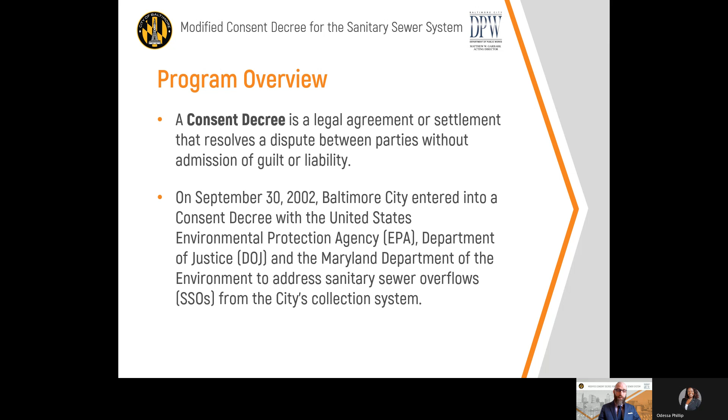We also had to develop a hydraulic model to evaluate flows through our collection system, and then we set forth projects that the city would complete to reduce overflows, and these projects were set to be completed by 2016. Now, the city was not able to comply with that 2016 deadline, in part because we discovered a hydraulic restriction at our Back River wastewater treatment plant.

So once we understood the scope of this almost 10-mile hydraulic restriction, it forced the city to reevaluate its plan to remediate the sanitary sewer system. So we went back to the drawing board with EPA and MDE and modified our consent decree.

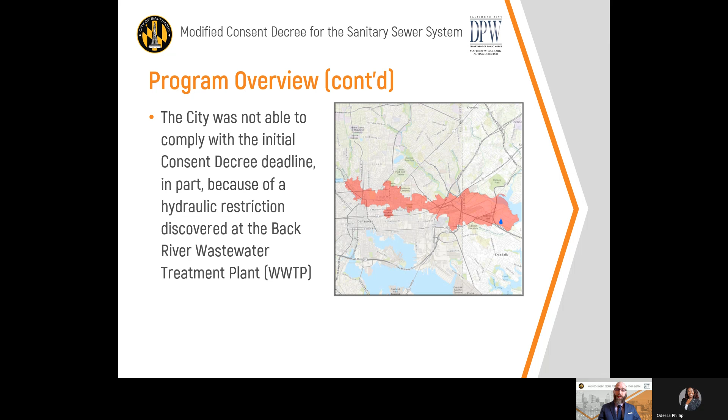So we're here today to give you some background on the modified consent decree, provide updates on the work we are doing to remediate the sanitary sewer system, really connect you to the people responsible for that work, and then answer any questions that you might have.

Now, when we drafted the modified agreement, we didn't simply add a few projects onto what we agreed to do in 2002. We did add projects, specifically the Headworks project, that is designed to eliminate that hydraulic restriction, but that's not simply all we did. We developed a new strategy that implements adaptive management concepts as seen in our two-phased approach, which creates a specific performance goal for our system once the remediation is completed.

We're not just completing a list of projects, we will complete existing projects plus the Headworks project. That should address 83% of the sanitary sewer overflow volume. But we're then going to evaluate the effects that those projects have had on our system. Then we're going to design and complete any further projects that are needed to establish a certain level of protection. We want a 5-year level of protection citywide and a 10-year level of protection for sensitive areas.

We also extended the time frame for compliance, and we did this for two reasons. First, we're doing more work, and I think we're making sure that we're doing things correctly.

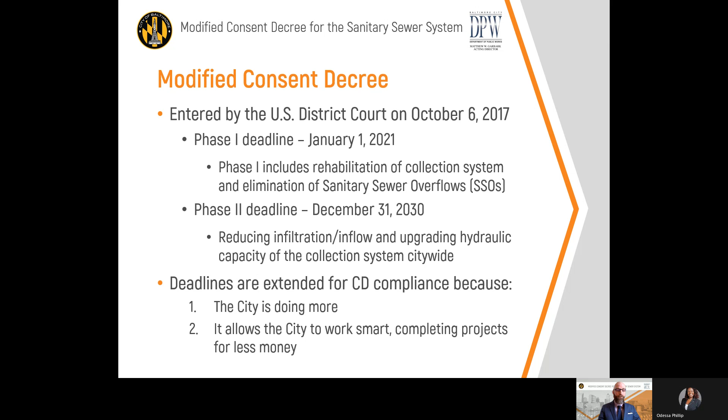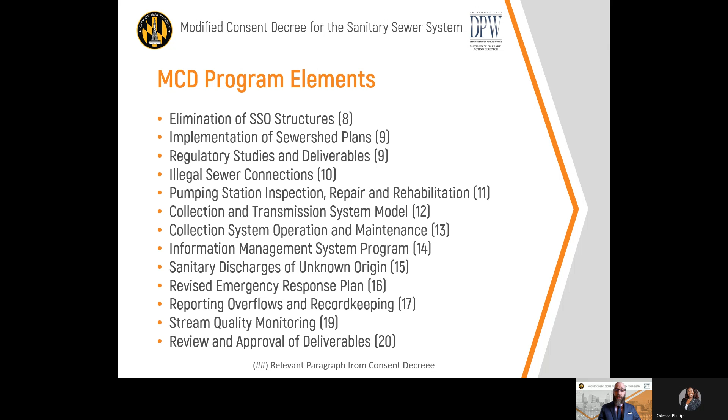The first paragraph being paragraph 8, which addresses SSO structures. SSO structures are essentially pressure releases that are designed into the system before the Clean Water Act was enacted. When a section of pipe reaches its capacity to transport sewage, an outfall was constructed to discharge to a nearby stream. They had their purpose from an engineering standpoint, but it's certainly not good for water quality, and we wouldn't design a system like that today.

So we're eliminating them, but we just can't seal them up. We have to ensure that the system has the capacity to handle the expected flows. Thus, we have to monitor those flows, and then we have to make sure we design an appropriate fix. To date, we have eliminated 60 of the 62 structured SSO points identified in the 2002 consent decree. The 2 remaining SSO structures discharge to the Jones Falls. We'll be able to eliminate them once we fully construct the Headworks project and ensure that we have eliminated the hydraulic restriction.

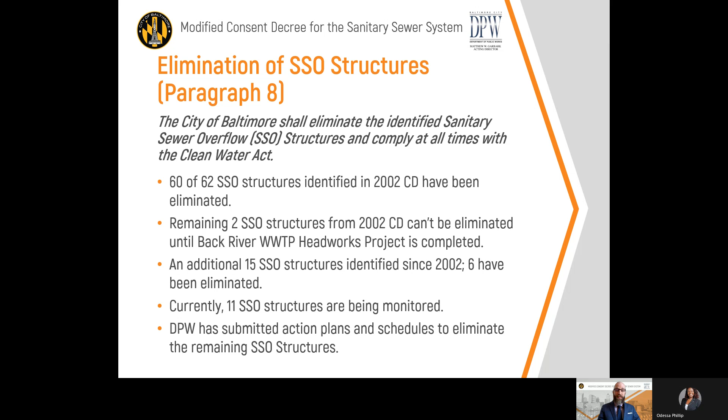We subsequently found 15 additional SSO structures and we have been able to eliminate 6 of them, one of which was eliminated this past year, and that was an overflow structure in the Herring Run sewer shed. That leaves us with 11 SSO structures that we are currently monitoring, and we have approved plans in place to eliminate all of them, and we can start evaluating if it's safe to eliminate these structures once projects are completed.

And that brings us to paragraph 9, which are phase 1 projects. And as discussed earlier, the modified consent decree utilizes a 2-prong approach that incorporates an adaptive management process. We have a list of phase 1 projects that are set forth in Appendix B of the modified consent decree, and the deadline to complete the last of these projects was December 31st, 2020. Of the 39 phase 1 projects, we have experienced delays in 8.

We've had delays caused by various issues: legal disputes, project changes that were designed to limit impacts to our parks, unforeseen conditions encountered during construction, and impacts caused by the COVID-19 pandemic. This has caused work to continue past the December 31st deadline. Nonetheless, over the past 12 months, we have completed 5 projects and are pushing hard to finish the outstanding work.

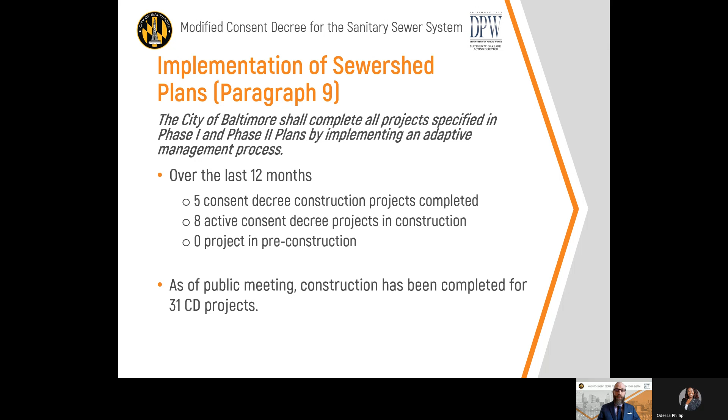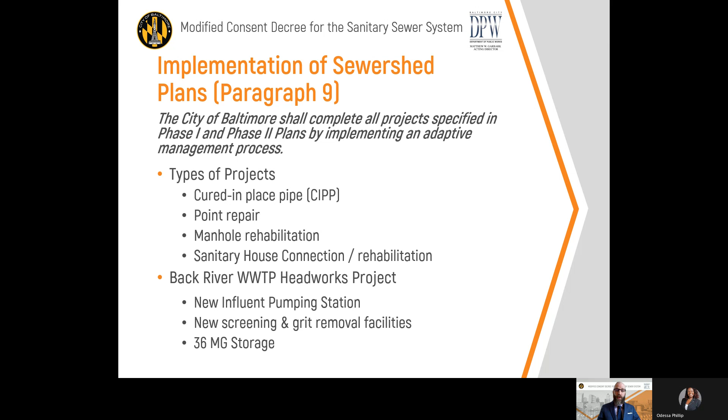Once phase 1 is complete, DPW will then be able to fully evaluate the progress made during the phase 1 period. That being said, because the ongoing work is limited, DPW has already begun working on our post-construction flow monitoring and has even begun designing phase 2 projects where appropriate. And we'll talk about that a bit more later on. Here are some of the examples of the type of projects that we were doing in phase 1. The focus really is the remediation of the system.

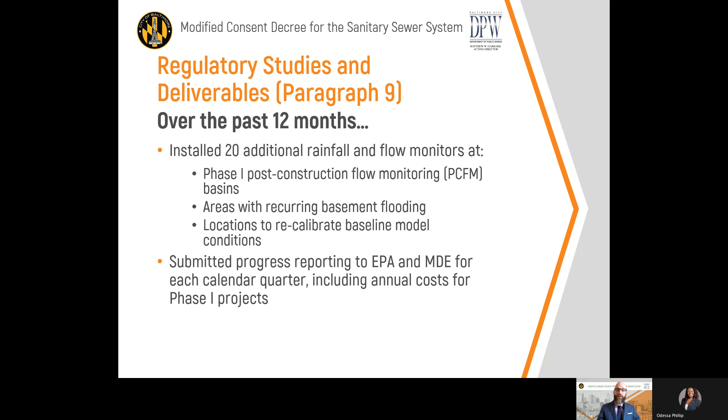In addition to the construction projects, the city is required to provide additional deliverables to the state and federal regulators. And as discussed, we're nearing the end of phase 1 and we're preparing our post-construction flow monitoring plan and have been installing additional flow monitors in our system in order to get that data to determine how our system is functioning. We have also submitted timely quarterly reports to the state and federal regulators, and those are all posted on our website for review.

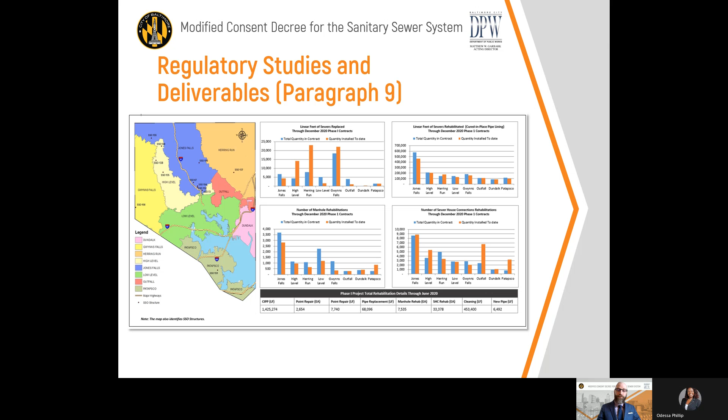Here's an example of a graphic that we provide with the quarterly reports to show our progress. We want to make this digestible for the public. And again, all of these reports are available online.

Our biggest phase one project is the Headworks project at the Back River Wastewater Treatment Plant. We sort of treat it differently than the other phase ones. Headworks is the project that will eliminate that 10-mile hydraulic restriction. It's an expensive fix, totaling approximately $430 million. But per our hydraulic model, the phase one projects will eliminate approximately 83% of the SSO volume experienced by the city, and Headworks is really responsible for the lion's share of that reduction.

DPW has completed the new screening and grit removal facilities, and most importantly has constructed the new pumping station that contains 8 pumps with a combined capacity of 750 million gallons a day. All the pumps have been tested, and I'm happy to report that the pumps were activated in December. So we have flows through the new Headworks project into Back River Wastewater Treatment Plant as we speak.

This has allowed the treatment plant to receive increased daily flows, but the treatment plant itself has a capacity. It generally treats on average about 150 million gallons a day during the course of a year, but can safely handle high flow events now as high as 425 million gallons a day. The city is poised to put holding tanks into service that will further allow the plant to store an additional 36 million gallons to accommodate even higher daily flows.

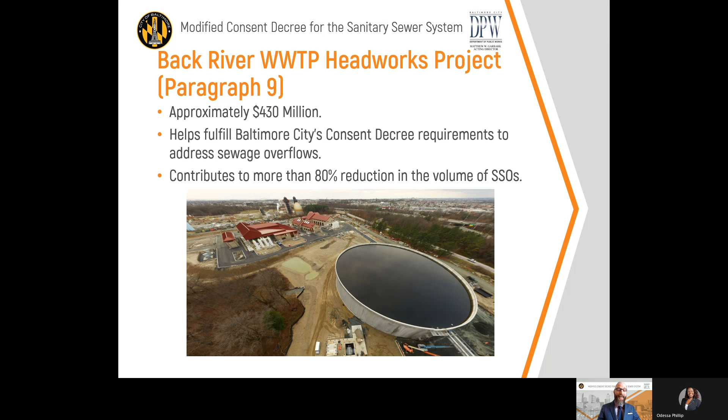If you look at the picture, you can see the plant. It has the red roofs in the background in front of our golden eggs, the digesters. And in the foreground is actually one of the holding tanks that we'll use during very high flow events. And as you can see there, it's actually filled with water, and it is being hydrostatic tested so it can be put into service.

Paragraph 10 addresses illegal sewer connections, and the city has a plan to eliminate illegal sewer connections when they're identified. These are often clear water connections, things like roof leaders, which direct stormwater flows into the sanitary system. As we discussed, we don't want the capacity of the sanitary sewer pipes used up by stormwater. If the capacity of the sanitary sewer mains are exceeded due to the introduction of clear water, groundwater, or stormwater, the system will experience wet weather overflows.

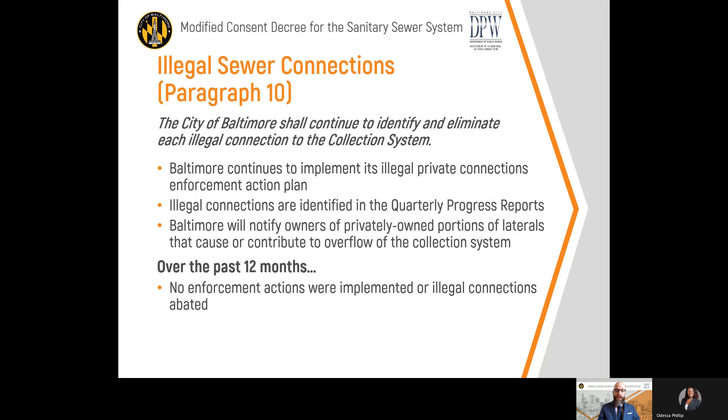Most of the city's enforcement actions occurred in the early phases of the 2002 consent decree, and thankfully we did not find any new illegal connections in 2020, so no enforcement was necessary. DPW is continuing to look after its pumping stations. The city is not flat, so pumping stations are used to push sewage over higher elevations so then they can gravity flow. We had no overflows or events that were likely to cause an overflow from any of our pumping stations in 2020.

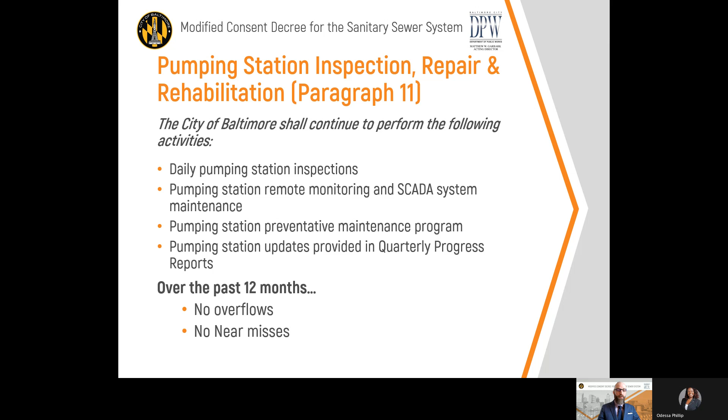One of the more impressive tools that the city is utilizing is our hydraulic model. The model helps us predict how our system functions in different situations. So it's really necessary to help us determine the impacts our projects are having on our system, as well as planning for phase 2. And we use the model to evaluate impacts caused by rain events.

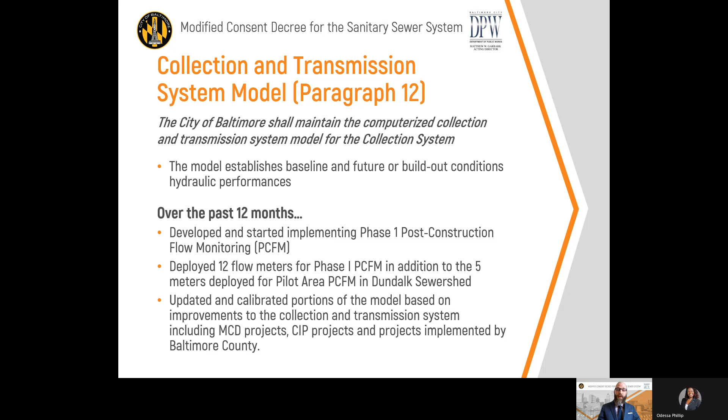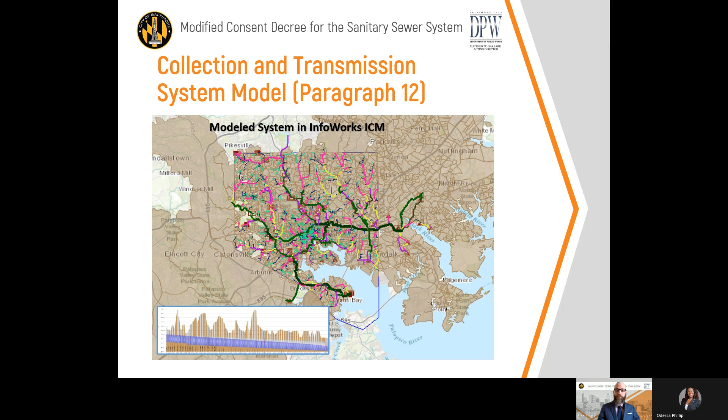DPW established the Office of Asset Management to work on proactive maintenance of our utilities. Our asset management staff prepared our O&M plan, our operation and maintenance plan, which was approved by the regulators in 2018. And we did do an annual update to that plan at the end of 2020. You can find the updated documents on our website along with the annual O&M progress report.

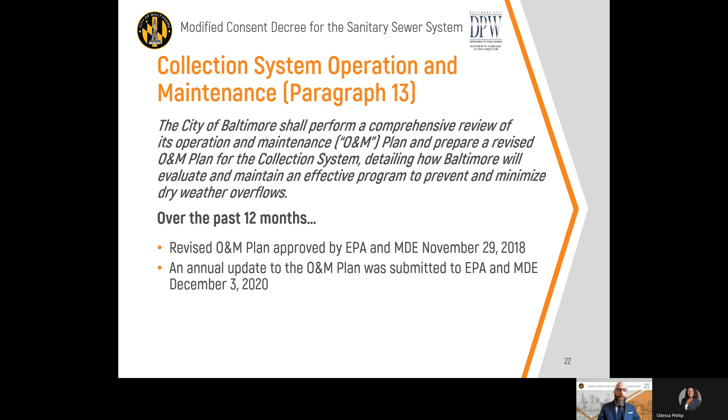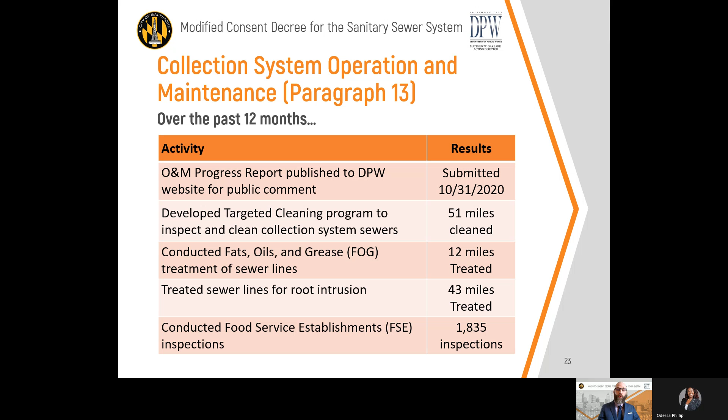So the goal here is really to switch from a reactive mode where we are responding to pipe failures or chokes to a more proactive mode where we're conducting preventative maintenance. And here's a list of some of that preventative maintenance done by the Office of Asset Management over the past 12 months. We're cleaning our collection system, treating the pipes to address the buildup of fats, oils, and grease and roots, and we're conducting inspections of food establishments to ensure that they're properly disposing of that FOG, fats, oils, and grease.

As part of our effort to work smart, we're continuing to utilize technology such as a mobile app to help our maintenance workers access CityWorks. That helps us record, report, track, and resolve customer service requests and work orders. We have continued to expand on our use of CityWorks and we have not experienced any disruptions during the pandemic.

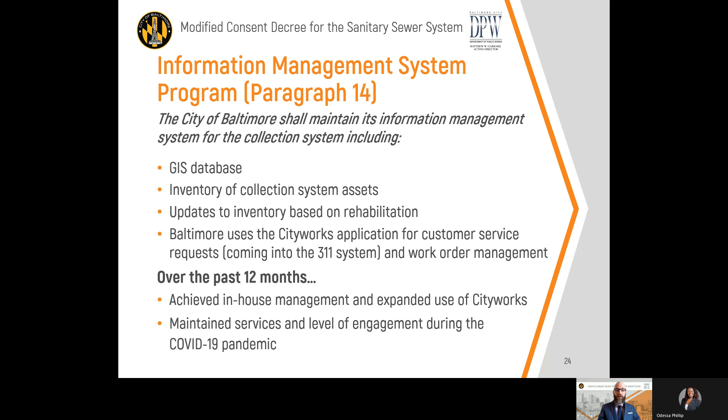DPW has a plan to address sanitary discharges of unknown origins. That was approved by the regulators in 2018. We've also continued to identify and abate SDUOs as we find them. So we are making progress. As you can see here, 11 SDUOs were discovered, 15 were abated. Some of those were from the prior year. And we have 3 SDUOs that are outstanding.

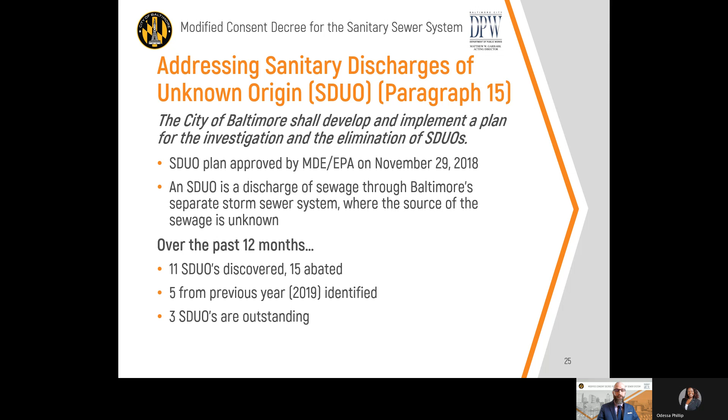We submitted our emergency response plan to the regulators in April of 2018, and we are still working with the regulators to finalize that document. In the interim, we continued to conduct annual training to ensure that our staff is well drilled in the requirements and protocols.

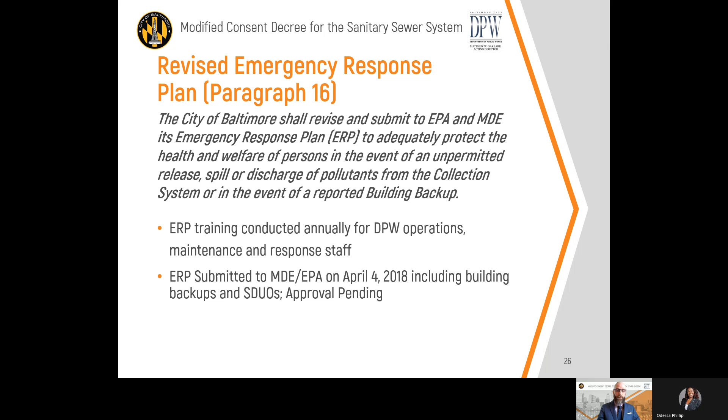DPW is continuing to track and report sewage overflows. And that data shows our efforts are working. We have seen a pretty consistent reduction in SSOs, a 30% reduction from 2012 to fiscal year 2020. We did have an uptick in fiscal year 2019, which captures a lot of that rain that we received in the summer of 2018. And as you know, 2018 was a record year for rainfall, so we really expected to see that increase. But we are seeing those numbers coming down again last year.

What is interesting is that we are seeing a significant amount of dry weather SSOs. About half of the SSOs that we experienced in 2018 were dry weather SSOs. And we still had a significant amount of dry weather SSOs in 2019 and 2020. So even though we're making progress and doing a significant amount of work to proactively maintain our system, we can really always use the public's help. The public should properly dispose of fats, oils, and grease and other waste to help prevent chokes and reduce our maintenance of the system.

And residents can also help by maintaining cleanouts on their properties to allow the city to have easy access to maintain lateral connections. We have materials available on our consent decree webpage, and there are also going to be materials at the learning stations at the end of this presentation.

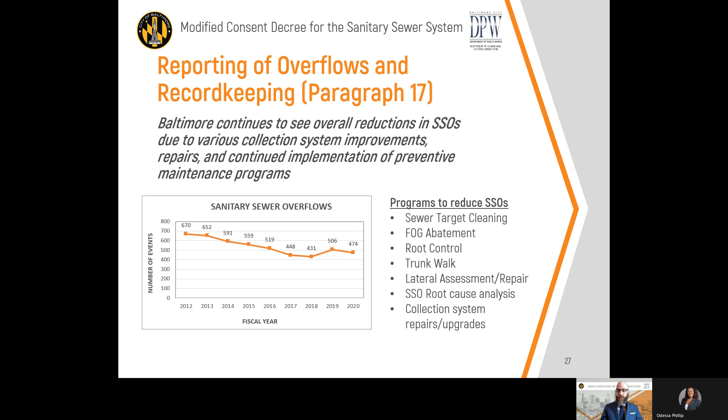The city continues to monitor water quality around the city under the municipal separate storm sewer permit. That is a separate permit, not part of the modified consent decree, but DPW conducts ammonia screening on a weekly basis, and then stream impact sampling is further conducted monthly. Now, this information provides general information on water quality and not specifically sewage overflows. We have a number of contributors that can impact water quality. Development activities, human behavior, changing regulatory schemes, at times historic pollution, weather patterns can affect water quality, and activities elsewhere in the watersheds.

It's important to note that Baltimore County is under a similar consent decree. They have been diligently working to improve their portions of the shared sewer system. And thus, the water quality data really captures all of these factors. So there's not a direct causal relationship between water quality and the reduction of SSOs or the elimination of SDUOs, but we can still look at long-term trends.

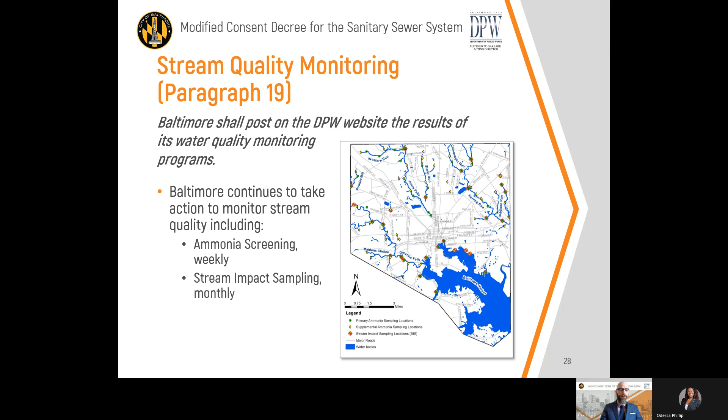These samples are taken during dry weather conditions. And although there's not a direct correlation to SSOs, we may still be seeing some of the impacts from dry weather overflows. So we can still do more to reduce overflows: properly disposing of fats, oils, and grease, keeping trees away from our sewage lines, stopping the use of flushable wipes. Things like that can help us avoid dry weather overflows. We all need to do our part to keep our public system working properly.

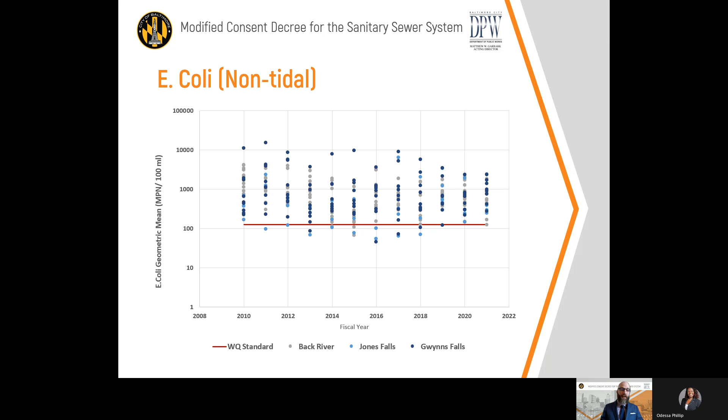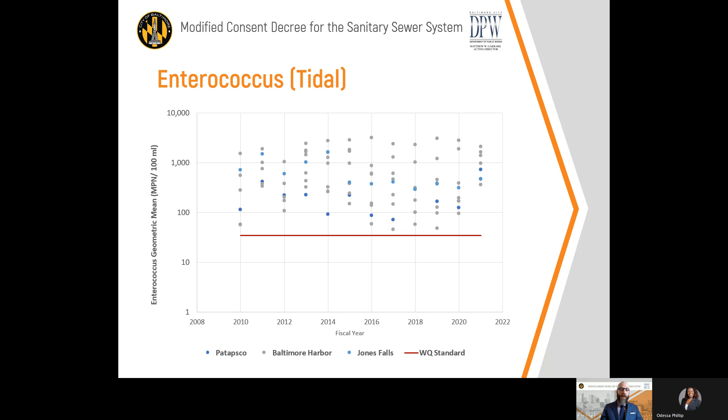Here we have similar data for tidal waters. In this case, we are measuring Enterococcus, which is a different type of bacteria. Nonetheless, the results are similar. We're not there yet.

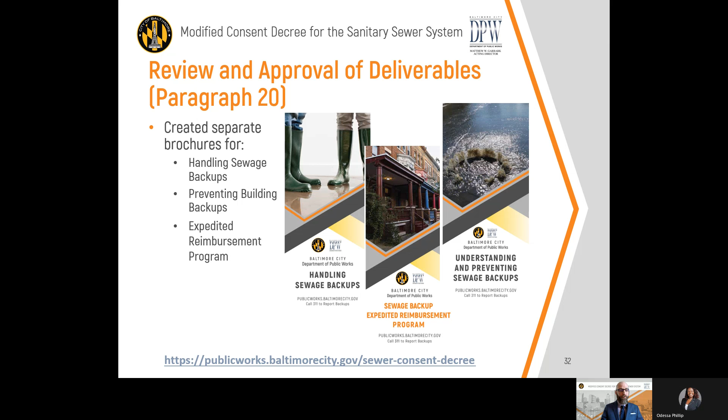But that brings us to paragraph 20 and some of the public outreach that the city has been doing. The city has produced new brochures to help educate the public on the reimbursement program, how to safely clean up sewage backups, and maybe most importantly, how to prevent them, which I've been discussing. And to that end, the city has also produced social media campaigns to help educate the public regarding the proper disposal of fats, oils, and grease.

As noted previously, we update our website with deliverables when they're submitted to our regulators, as well as other information to increase public engagement. And we encourage you to use our website to keep updated on the work the city is doing. You can even sign up to receive notifications on our website.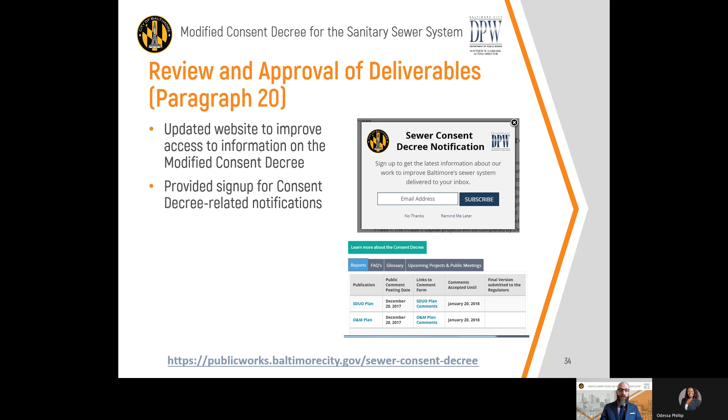So in review, we're doing more to prevent overflows through a modified consent decree. We're thoroughly evaluating our collection system, and that will continue at the end of phase 1 as we're doing our post-construction flow monitoring and preparing for our phase 2 projects. We're using technology to try to work smart, and we're completing projects in a way that is economical for the people of Baltimore. And in doing so, we're also investing in local small businesses.

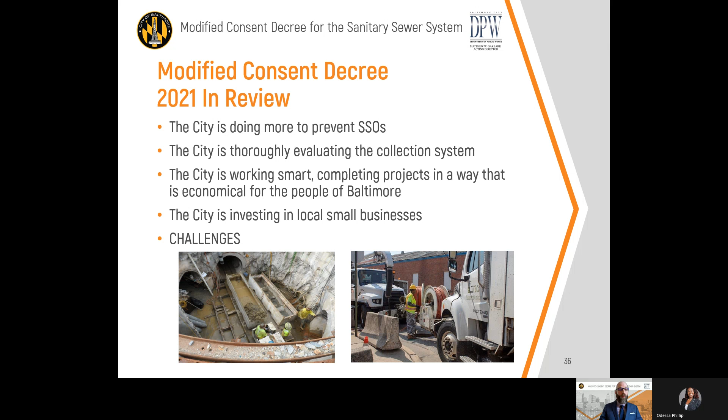At the conclusion of my speech, we're going to have you proceed to breakout rooms and hear a list of the different breakout rooms and the topics that are being discussed. So we'll encourage you to take part, go into each of the rooms, hear what the experts in these topics have to say, and answer any questions that you might have.